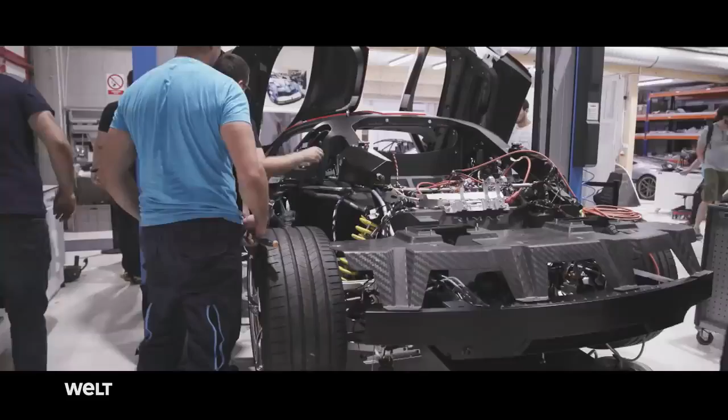The heart of a startup beats in the supercar's production plant. Around 700 specialists manufacture almost all of the prototype's components in-house. They're just throwing you into fire and you need to deal with it. The engineers at the fledgling sports car factory use the results of the demanding crash and stress tests to optimize each millimeter of the supercar.

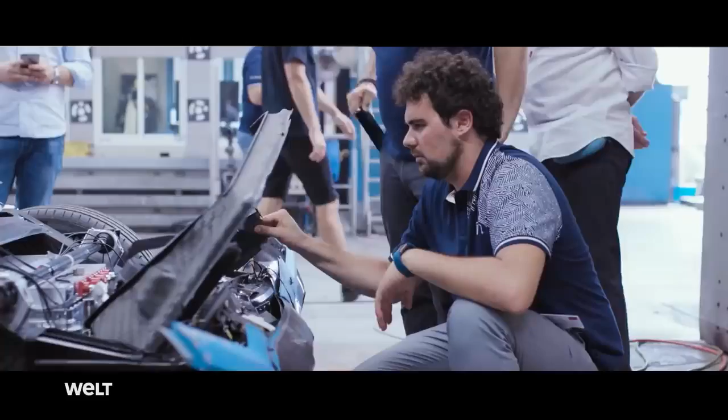We are perfectionists. We want really to show what is possible, and if you want to show what is possible, you cannot cook with the same water like everybody else. At the end of 2020, Rimac will start production of an electric vehicle with the most powerful battery, the most stable chassis, and the best performance in the automotive industry. The C2.

The fastest electric cars come from what was previously automotive no man's land, Croatia. The hypercar manufactory Rimac Automobili is located just outside the capital city of Zagreb in Sveta Nedelja. Since 2009, top technology for super sports cars from around the world has been created at the company's 11,000 square meter premises. Here, 700 specialists are now also developing the components for the manufacturer's latest model, the C2.

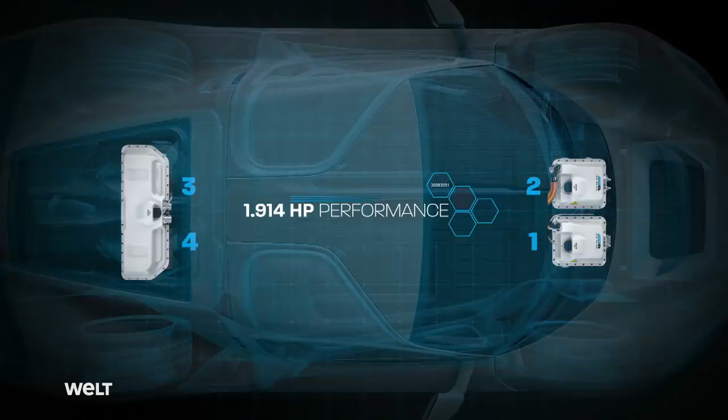The prototype of the C2 is a fully electric GT hypercar, a total of 4 electric motors with an overall output of 1,914 horsepower. They accelerate the electric sports car from 0 to 100 kilometers per hour in less than 2 seconds. The vehicle is automatically governed to a maximum speed of 412 kilometers per hour.

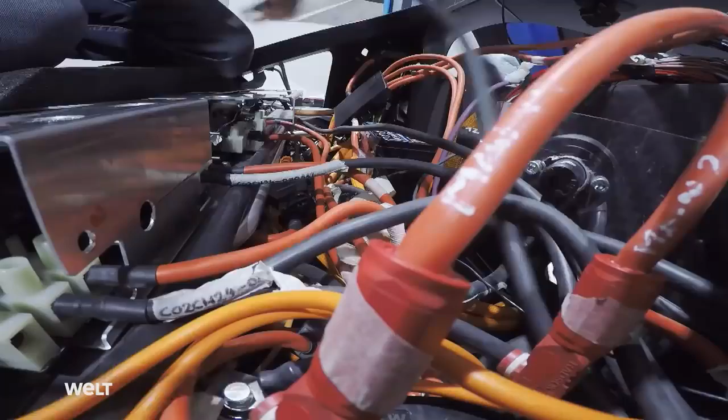The C2 is the second model from the company's young founder, Mate Rimac. A maximum of 150 of the €2 million electric sports cars are to be produced in Sveta Nedelja. Besides its own models, the manufacturer also produces vehicle components for other brands. This extensive in-house production enables even minor component details to be determined individually.

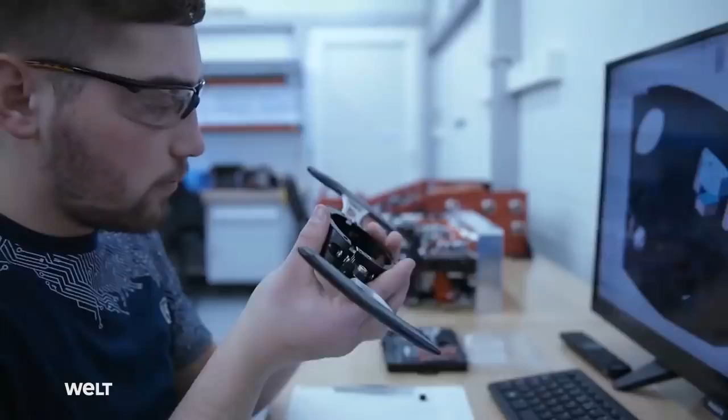What we are really good at is that we are producing the car and also producing the components for the car. And when we do something like that, then you can optimize the whole system. You can optimize the battery for the motor, the gearbox for the battery, and so on. If you can develop all the components in-house, if you have the flexibility, we can really optimize the whole system, the whole car and all the systems inside of the car.

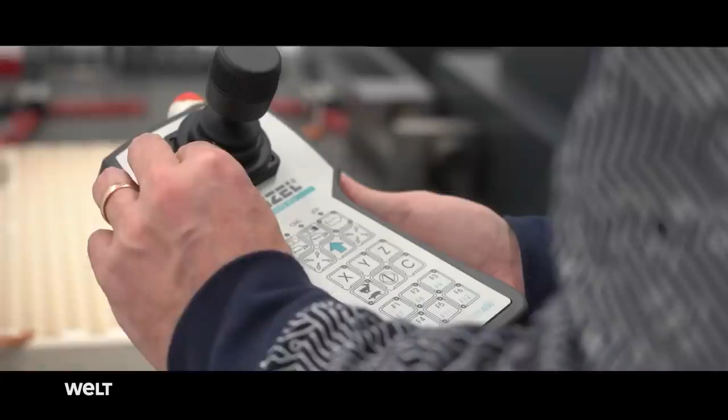The manufacturing facility is equally as individual as the C2's parts. Instead of classic assembly lines, autonomous high-tech departments are found here. Virtually all of the prototype's elements are produced on-site at Rimac. 90% of the C2's basic frame is made of the flexible lightweight material carbon. The Croatians produce the hypercar's 200 carbon fiber elements completely using manual labor.

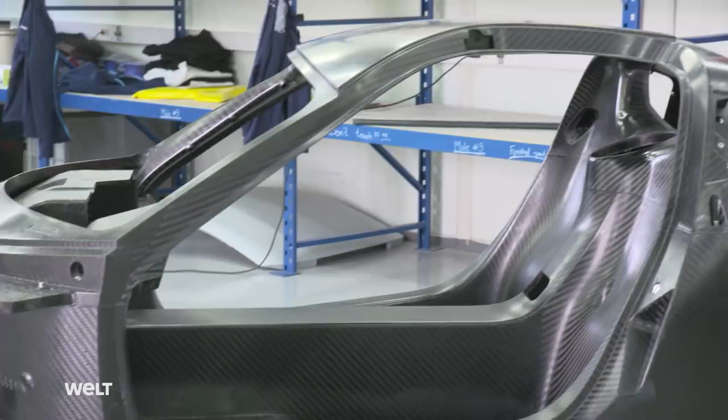I think that's specific for us, that we do it all in-house. Normally other companies do carbon fiber outside. We use carbon fiber to reduce weight. It doesn't rust, it lasts longer, and with composite materials we can produce more advanced material than with the normal technology used in the car industry.

The Croatians have been fine-tuning the individual parts, the design, and the performance of the C2 for the past 4 years. The design engineers have built a total of 16 prototypes and tested them down to the very last bolt. The young company founder's passion for futuristic hypercars began at a very early age.

Our history is a really long one, although it's only 10 years. I was born in Bosnia, where there were no cars where I was born. And then when the war started, we moved to Germany, where there were a lot of cars. My parents tell me that I was crazy about cars before I could walk or talk. When I was 18 years old, I bought myself a 1984 BMW 3 Series, 4 years older than myself.

When the gas engine of that old car blew up, I decided to make it electric and to build it into a race car, to race gas-powered cars, to show that it can be faster than them. Which I did. I broke 5 FIA and Guinness World Records with that car, which was a great learning experience for me, to learn how to build this car and improve it. Although everybody was laughing seeing an electric car on the racetrack, I wanted to show that electric cars don't have to be slow, boring, and ugly.

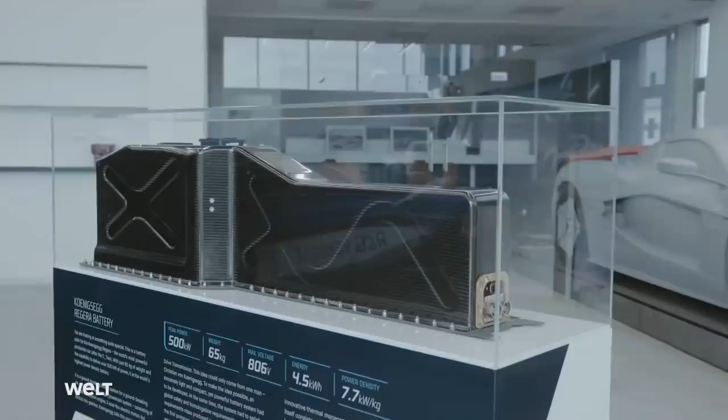None of us had any experience in the car industry, so we had to figure everything out. With no experience, no money, I was 19 years old, so it was a really tough time. But to survive, we started to work for the car industry. We started to develop cars for them, batteries, electronics, and this became our main business, to work for the car industry.

Today, after a lot of hard work of many people, we are now almost 700 people producing some of the world's fastest electric cars, the C2, where we want really to push the limits of what is possible. We want to show what can be done. And we are now in a big expansion phase, and hopefully we'll also build soon a new factory.

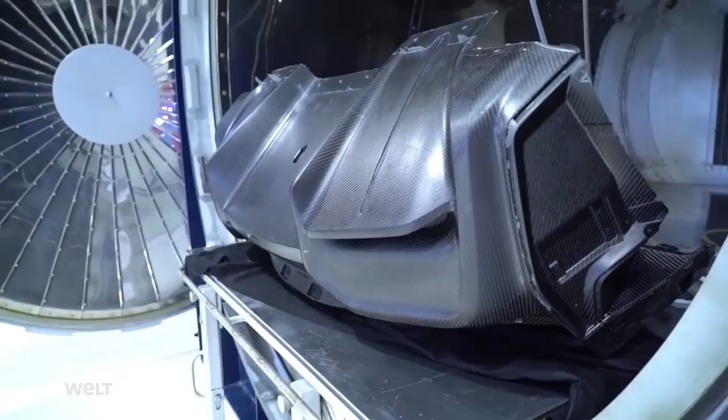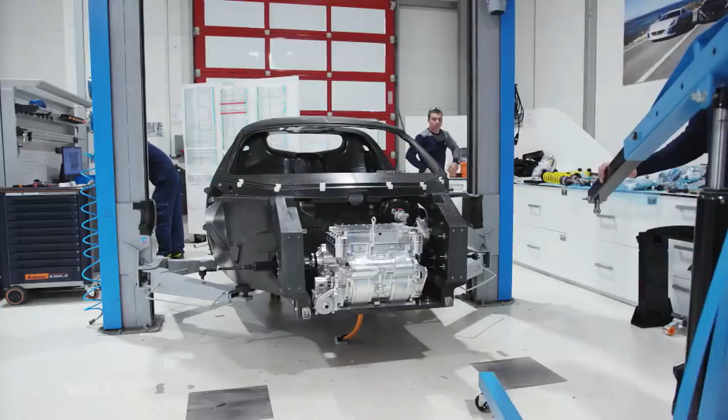Within 10 years, the garage has been transformed into gigantic factory shops. Today, nobody is laughing about the young visionaries' idealistic ideas. Quite the opposite. Global company groups such as Porsche and Hyundai have now invested 115 million euros in the Croatian sports car manufacturer. This cash is being used to fund the development of technologies and components that are unique within the automotive industry.

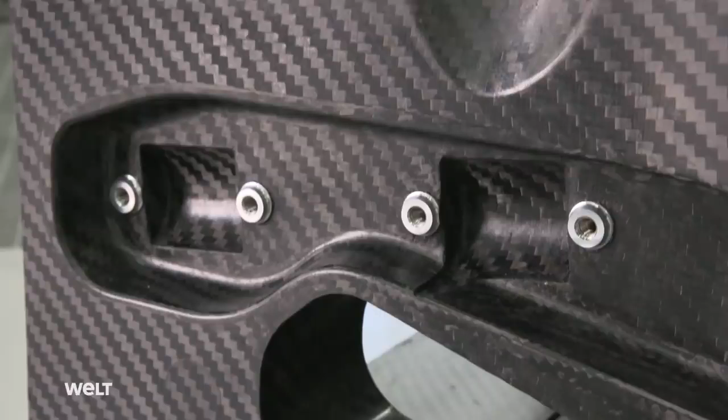This enormous carbon fiber framework comes from the company's own gigantic autoclave. The cockpit frame is a crucial key component in the C2's enormous power output. The electric sports car's outer skin conceals the biggest interconnected fully carbon part in the automotive industry. The 200-kilogram monocoque ensures that the C2 prototype is particularly light and extremely stable.

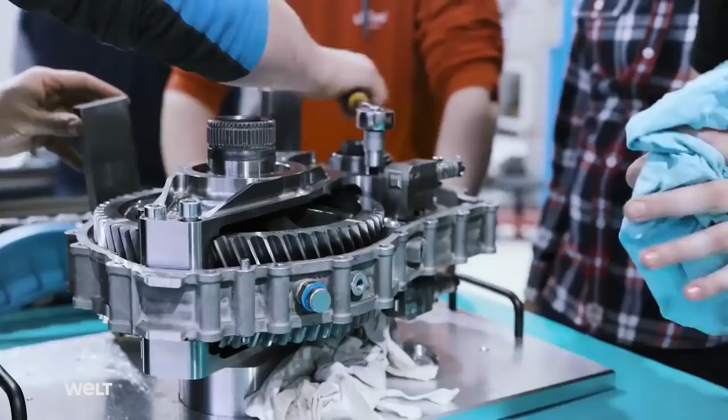In the assembly area, the technicians are now equipping the empty cockpit frame with everything that transforms the C2 into a high-performance car. At first glance, the assembly shop doesn't look like the birthplace of one of the fastest vehicles in the world. Installing the motors still involves real manual work for the technicians.

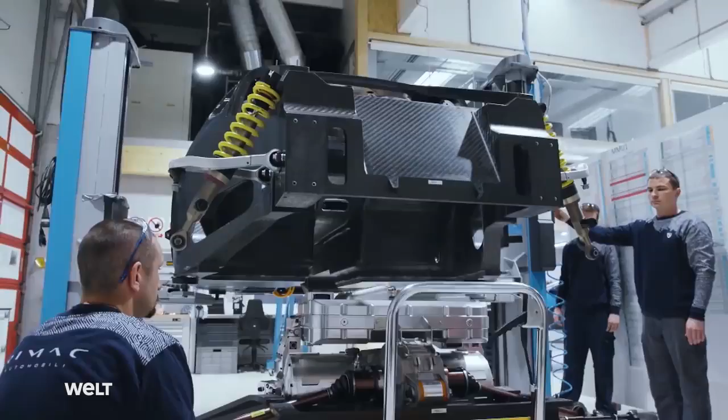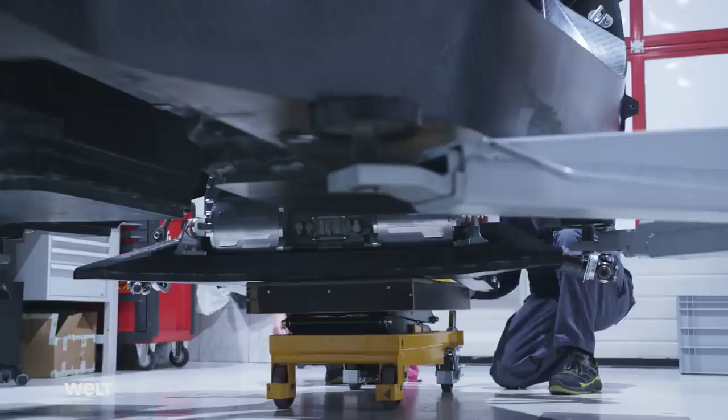The all-wheel drive vehicle is equipped with 4 electric drives and therefore needs no differential. The advantage is optimal control and a maximum efficiency of 97%. This means that virtually all of the powertrain's energy is transformed into kinetic energy. In comparison, the maximum efficiency of a combustion engine is 45%. An in-house motor production facility is also located at the plant premises.

So this is the rear C2 powertrain with the motor, inverter, and 2-speed gearboxes in the rear. So this is the rear powertrain unit with 1000 kilowatts or 1 megawatt. And this is the front powertrain unit with 400 kilowatts. So they are quite different if you look at them. So the front powertrain has the motors in the middle, the gearboxes on the sides, and then the inverter on the top. In the rear, the gearbox is in the middle.

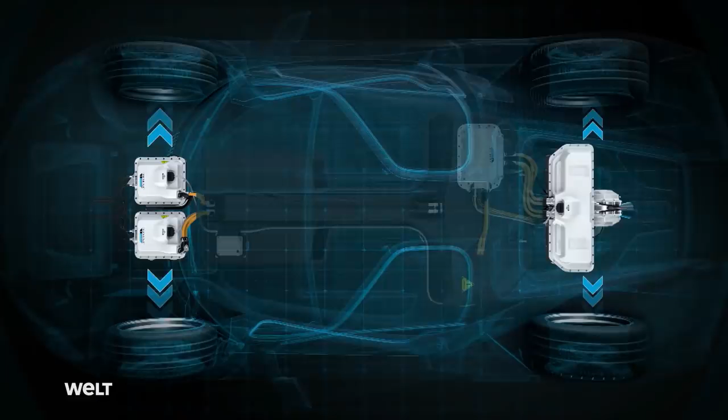It's actually two two-speed gearboxes in there. So every motor has its own gearbox, but they share the housing, and every gearbox is an independent two-speed gearbox. Each motor is a 500 kilowatt, 700 newton meter motor, and the 1 megawatt inverter. So all of these parts are made in the company in different parts and then assembled here. Each of the prototype's tires is equipped with a separate motor. Together, they generate a torque of 2,300 Newton meters.

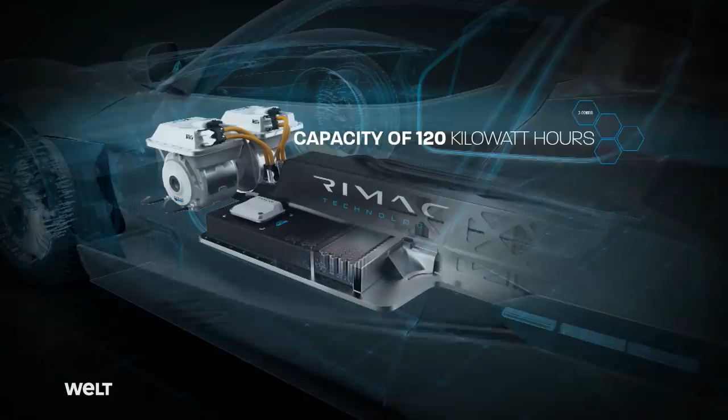The C2 draws the energy for its all-wheel drive from a gigantic battery pack with a capacity of 120 kilowatt hours. This is intended to give the Rimac a range of up to 550 kilometers and to enable it to reach 80% of its rechargeable battery output again in less than 30 minutes during the subsequent charging process.

In the assembly shop, the technicians are now installing the 600 kilogram battery pack in the C2's body shell. The rechargeable battery has an enormous output of 1.4 megawatts. This amount of energy can be used to supply an entire single-family home for several days.

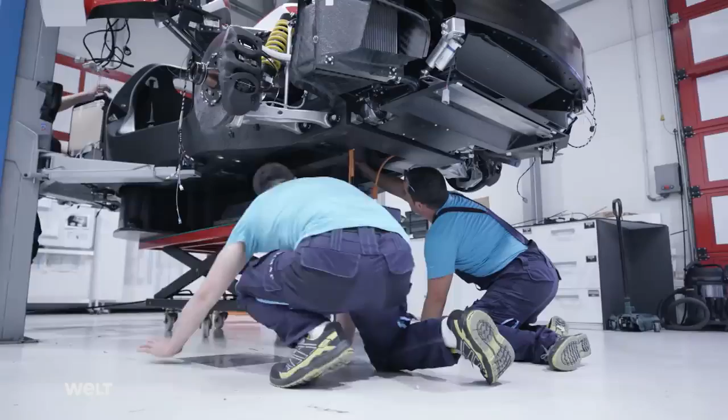The entire rechargeable battery unit consists of 6,960 of these small lithium-ion battery cells and is designed so that each accumulator is surrounded by fire-resistant material in a sandwich construction.

With a length of around 5 meters, the C2 is bigger and even more luxurious than its predecessor. It is also fitted with a complex sensor system and is set up for Level 4 automated driving according to Rimac. Autonomous driving is currently subdivided into 5 levels. The C2 is therefore at the level prior to full automation. The car can be guided completely by the system, even if obstacles suddenly emerge. However, the driver must be fit to drive.

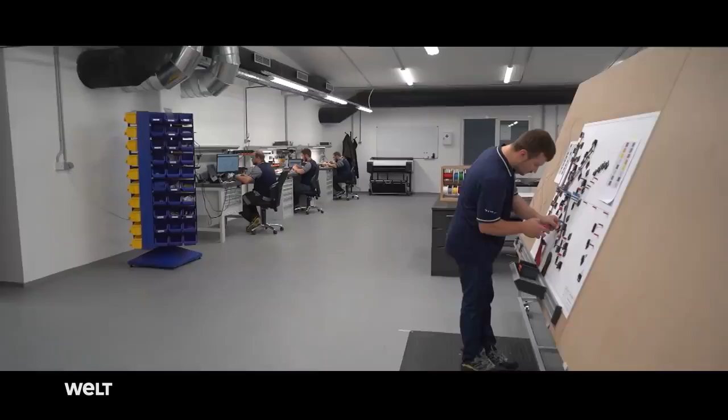Certain components are produced at a further factory site located 40 kilometers from the main plant. Among other parts, the Croatians fabricate the two-seater's wiring harness here. The Rimac's employees assemble each of the 26-kilo looms by hand. The harness consists of a total of 15 different modules that subsequently supply all of the electronic systems with electricity.

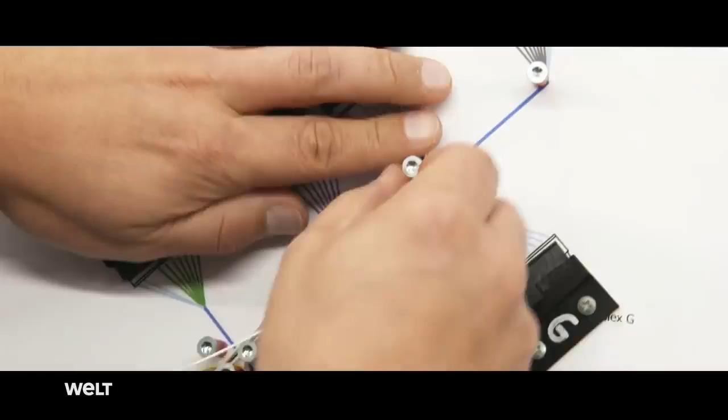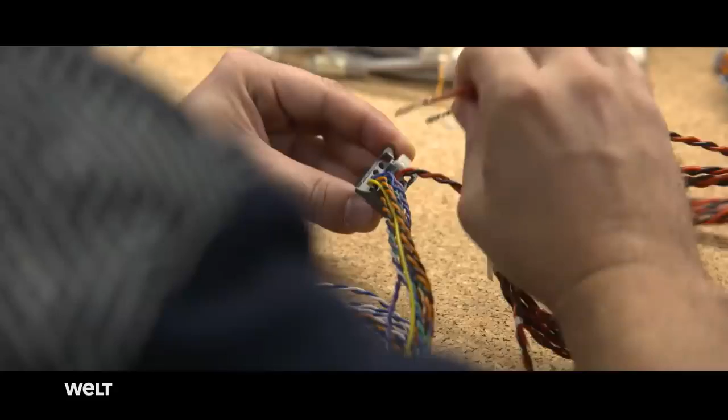Step by step, the electricians process the individual cables for the C2's power output, communication, and sensor system to form the next biggest loom. To do this, they seal the lines with cable lugs. A precise construction plan specifies which cables belong together. The workers took around 2 months to produce the wiring harnesses for the first prototypes. This experience enabled them to optimize the assembly of the 2,400 plug connections.

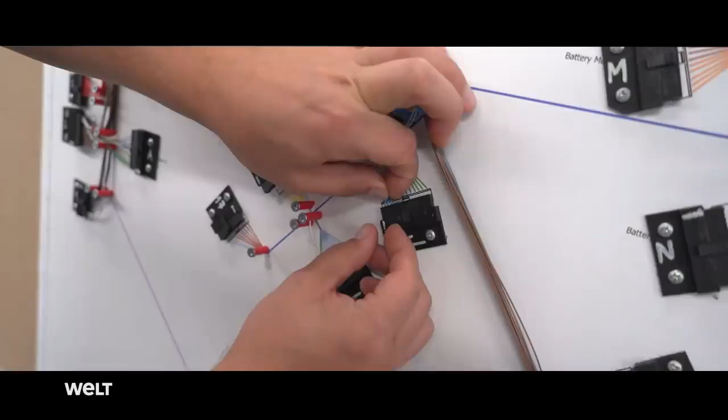In the first 2 experimental prototypes that we did the wiring, we had the wiring harness basically in one piece with some sub-harnesses. And when we installed it in the car, we could actually see what can we optimize, how can we produce the wiring harness faster, how can we produce the wiring harness safer, and what are the limits of usage.

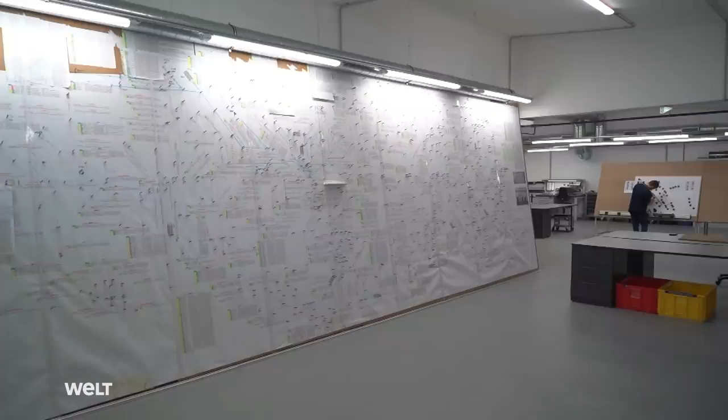The complete plan of a wiring harness measures 24 square meters. The 3.6 kilometers of cables are drawn on it. Later on, they can withstand up to 2,000 volts and are therefore equipped with special Teflon, which enables them to cope with temperatures of up to 200 degrees Celsius. When you have a high temperature or very high voltage, you cannot use just regular PVC insulation because it cannot withstand that.

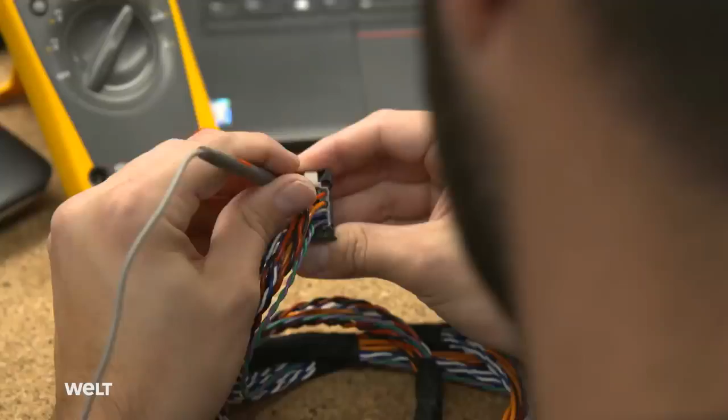These workers are testing the voltage. This is important because later on, a fault can shut down the entire system and, in the worst case, cause a cable fire. Here, each week, 7 employees produce 3 new wiring harnesses.

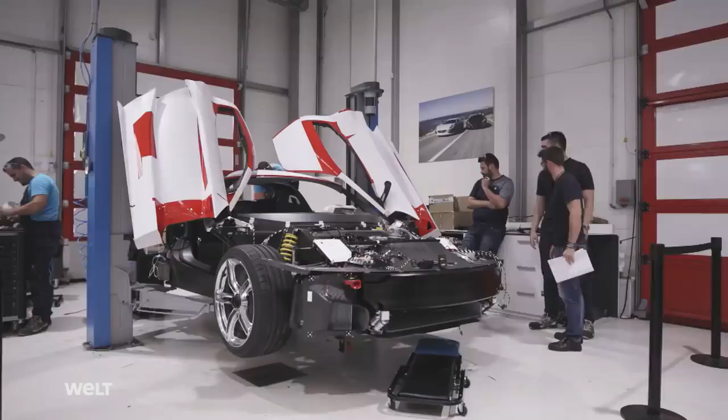In the main plant in Sveta Nedelja, the crew has fitted the wiring harness and all of the other components in the vehicle. Later on, these will supply the C2 with its incredible power. The rolling chassis is now drivable. The only thing now missing to complete the hypercar is the outer paneling.

During the first few years of the company's history, the Rimac team worked on several electrically powered prototypes, including a race car. In cooperation with legendary racing driver Nobuhiro "Monster" Tajima, they developed a near-series version of the Rimac Concept 1. To complete the e-runner on time, the young design engineers had to work under high pressure. The crew developed, produced, and tested the vehicle in just 4 months. The lack of time was not the only challenge they faced.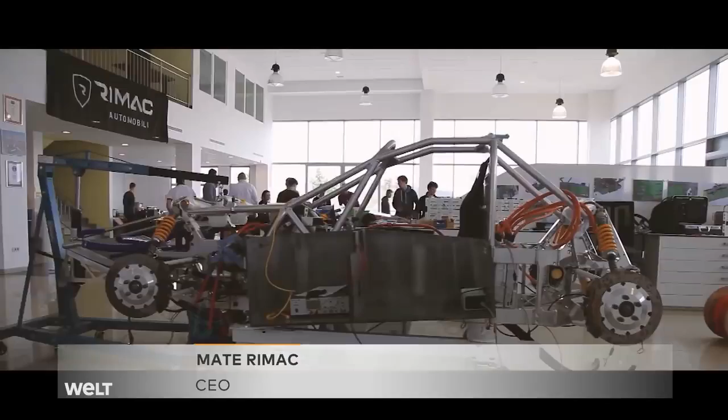There were a lot of challenges, but two that I really remember. So first, because it was an existing chassis, we had to package our powertrain, so the dimensions of the chassis didn't allow for the whole powertrain. So we had to make it shorter, and in order to do that, we were designing a very special transmission system.

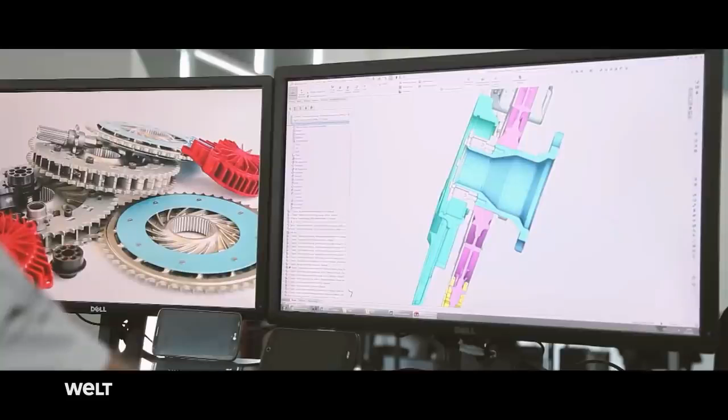Everybody who looked at it said it will never work. So we basically wanted to make a chain drive, and because of the high transmission ratio, the final sprocket had to be very small and the motor sprocket had to be quite big. So it was a big ratio, and everybody said this is never going to work, this was going to break.

To rule out this risk and to test the e-runner's output, the crew took the race car to a special roller dynamometer in Slovenia. The team didn't have much time left because the e-runner then had to be shipped to the USA immediately to get ready in time for a special race. Back then, the Rimac team wrote automotive history.

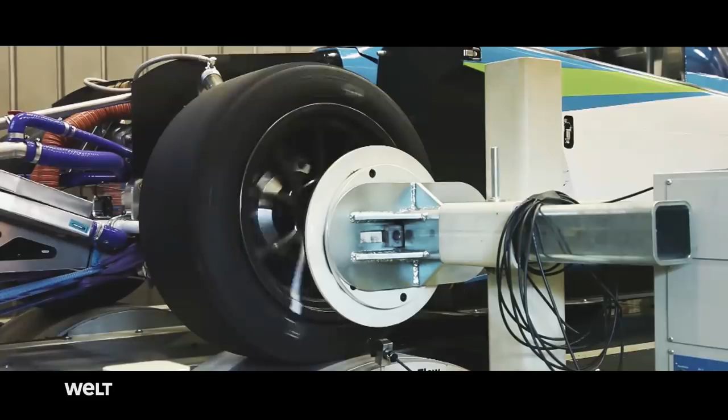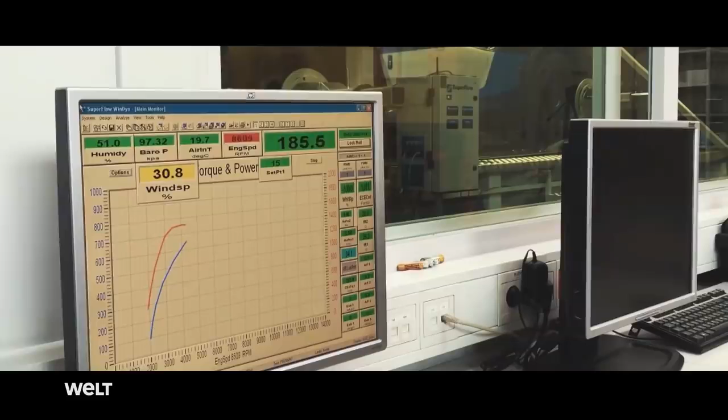In 5 seconds, the race car broke through the 200 km/h barrier on the roller dynamometer. The electric car developed an output of around 1,400 horsepower, a result never before achieved by any other electric vehicle. 1 megawatt. This is a fantastic day. Memorial day. History books. History day.

Racing legend Tajima carried out the final track test in person. You do the first meters, then the first 100 meters, first 1,000 meters. You increase the power gradually, you increase the speed, you increase the pace. But he immediately jumped into the car, went to the racetrack, and wanted full performance. So first time he was really disappointed. He was like, oh, this car is really slow. But we gave him just a little bit of power. We didn't want to increase immediately because you never know what can happen, what can go wrong.

In 2015, the e-runner and Tajima were on the starting line for the first time at one of the most prestigious races in the world, the Pikes Peak International Hill Climb in Colorado. The Japanese accelerated from 0 to 100 kilometers an hour in 2.2 seconds. The hill race is also called the Race to the Clouds because the participants climb around 2,900 meters to the finish line. Tajima, who celebrated his 65th birthday on the day of the race, achieved the best time of 9 minutes 32 seconds. With a top speed of 233 kilometers per hour, he established a new record in the USA at the time.

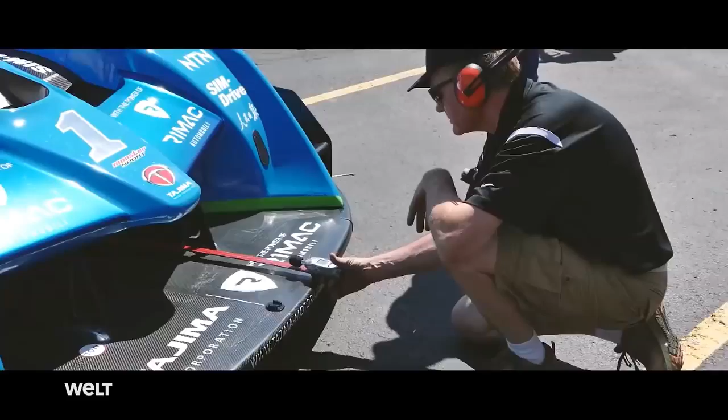The e-runner was created in 4 months. The C2 took the young startup 4 years to develop. The young hypercar manufactory's design department is also located at the company's premises just outside Zagreb. As the C2 is only the Croatian's second model, the team can still play a pivotal role in engineering the DNA of the Rimac hypercars. The design crew from Sveta Nedelja has also retained its startup character. Our team is really motivated, and the spirit of them is that they want to push the boundaries.

Within our team, we are around 15 people, and we cover all the aspects that concern the design, but also the brand. We start with a simple business card, a web page, a simple invitation for an event, all the way to either a component, such as a motor, or the car itself. The people that work here are happy to be able to work on different aspects of this project that we are conducting here. It's clear at first glance that the C2 is different but unmistakable.

Its alternative drive technology also poses design challenges. Each of the supercar's features has a specific purpose because the designers work according to the principle of form follows function. Its bulky proportions are by no means accidental either. We want to show the muscle that there is on each wheel. The C2 is not your typical hypercar, first of all, because it's electric, so it has a completely different powertrain and powertrain layout. In contrast to other hypercars, there is no gigantic engine block in the rear of the C2.

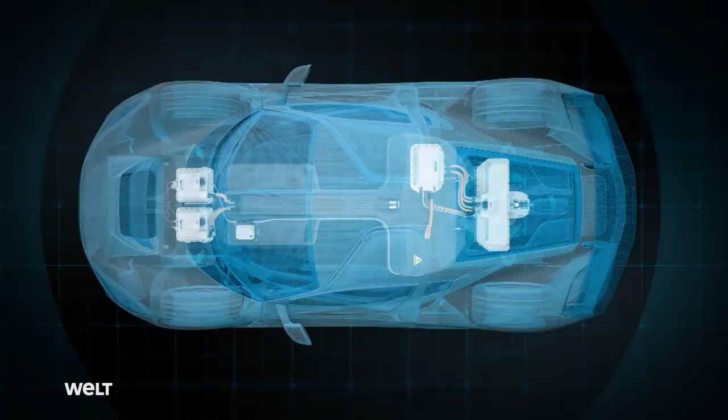Its electric drive is distributed between the vehicle's front and rear ends. The cockpit and also the center of gravity are therefore located precisely in the center of the car. The weight on both axles presses the Rimac onto the road and therefore ensures better road grip. Its enormous butterfly doors are a combination of scissor and gull-wing doors, which don't just look stylish, but above all, they make entering the flat vehicle more comfortable.

At the same time, its design DNA immediately gives away the electric sports car's origin. Rimac's signature sweeping lines on both sides culminate in this bar. It is intended to evoke the unmistakable tie that Croatian soldiers wore during the Thirty Years' War.

The word cravat is derived from the French cravate, the phonetically incorrect pronunciation of Croat, used during the war. On the cravat, there are 3 lamps that actually show which driving status you're in. You can also configure it towards the country of your origin. And you can also show the charging status of the car. It's a very important feature to show also from the outside, so that you don't always have to look on your app or go inside to see what the status is.

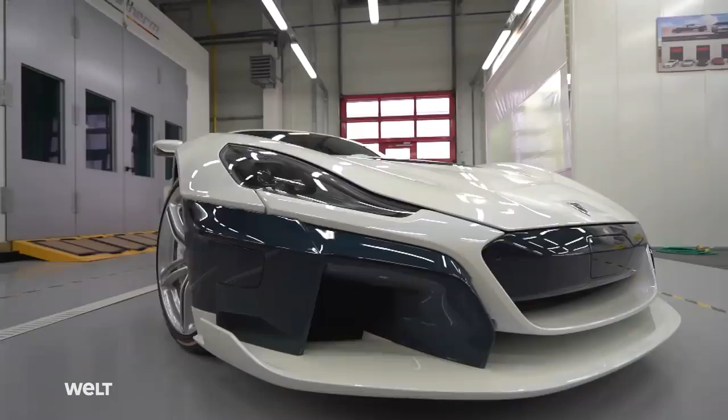The front is the most important part of the car for the aerodynamics. This is where the aerodynamics start. Here we have 3 air inlets for 3 different radiators and 3 different cooling systems. One is for the battery, which is the most complicated one. One is for the front motors and one is for the front inverters. And all these operate on different temperature ranges. This area is highly optimized to have enough downforce on the front axle, but also enough mass flowing through the systems.

An adaptive wing at the rear of the vehicle supports the aerodynamics concept. It adopts different positions depending on the dynamic load. This maximizes the downforce when cornering. The wing also serves as an air brake to stabilize the vehicle during heavy braking.

A 1-to-1 model of the C2 is now making its way into this gigantic wind tunnel. In several hundred test loops, the design engineers test the vehicle's aerodynamics modules here. They are the result of complex calculations and 3D simulations performed by supercomputers. Rimac also boasts its own aerodynamics department.

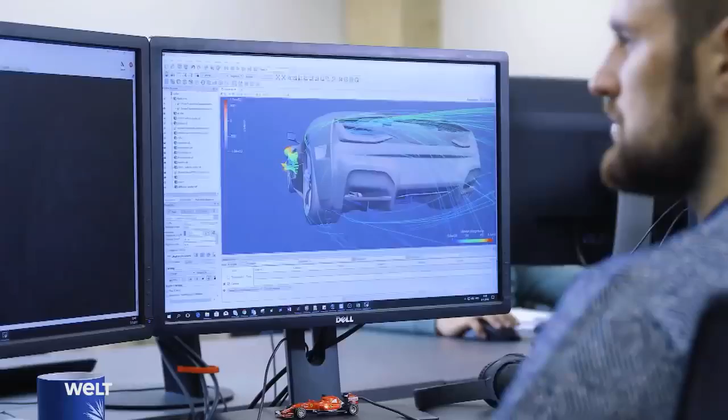It's been a really fast trip. You know, we are developing this amazing car from scratch. The processes are running sometimes for the first time, and we are working hard to make things happen. And when we see the things that we've been seeing thousands of times on the screen, when we see them in reality, they happen. First, we have all the anxiety, oh my God, will that perform the way we wanted? And then after we say, oh, thank God, it performed. Let's see if everything is okay, if everything is really good. As I said, it's been fast. Things are happening really fast.

The engineers then compare the results of the computer's aerodynamic simulations with the reality in the wind tunnel. The results only deviate by an average of 2.4% from the calculations. The aerodynamic systems are aimed at improving the hypercar's performance later on. The Rimac aerodynamics kit includes 3 active components. Air flaps in the hood press the prototype onto the asphalt and cool the batteries. The adjustable spoiler is located at the rear of the super sports car. Depending on its position, it ensures downforce on cornering or stabilizes the vehicle during emergency braking.

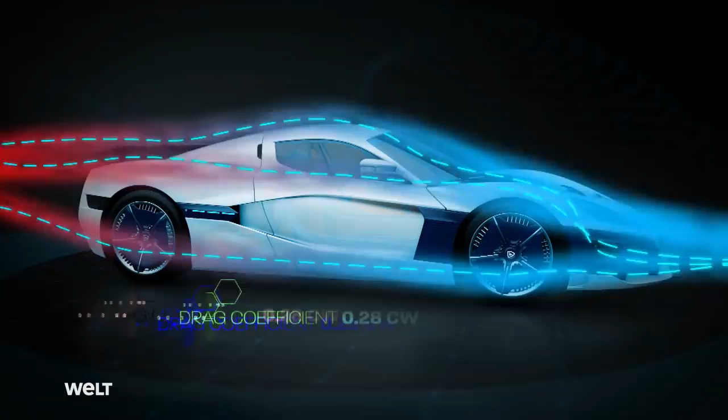With its drag coefficient of 0.28 CW, the C2 cuts through the airstream like a sharp knife. Checking the simulations on the real vehicle is important to decide where the startup should invest in accordingly expensive parts for the next prototypes. The aerodynamics modules press the Rimac onto the asphalt. The vehicle generally lies very flat on the road.

Every hypercar tends to be really low, so you would have to bend really low in order to get your head under the roof. So with these butterfly doors, part of the roof goes up with the door, so you can more easily enter the car. The car's interior consists almost completely of high-quality ultra suede. Later on, buttons on the dashboard can be used to configure how the C2's power is distributed to the axles accurately to 1%.

You can calibrate the car to your wishes. So you can tune the powertrain, you can tune the grip on the wheels, you can tune how you want the torque vectoring to behave. And this we show exactly with our knobs that we have in the interior, and this is a very unique feature that nobody else has.

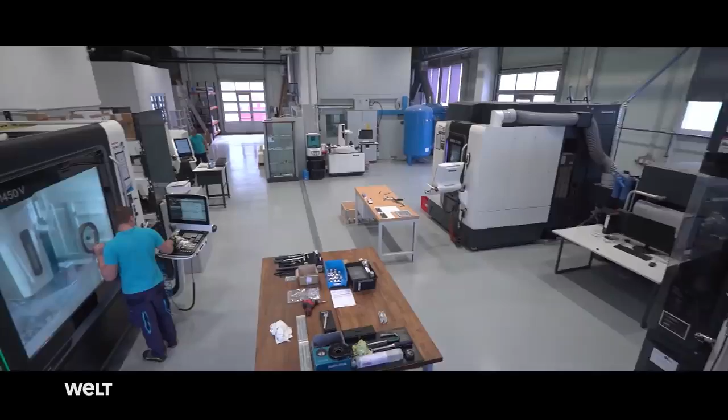To design their vehicles as individually as possible, the Croatians manufacture virtually all parts in-house. Components like the metal rings on the vehicle dynamics controllers are also made at the plant. Gigantic high-tech milling cutters are used at Rimac to manufacture complex aluminum components. Over 1,000 different components are produced at 7 automatic stations. One machine costs up to 450,000 euros and is equipped with highly sensitive sensors. This poses a significant business risk for the young company.

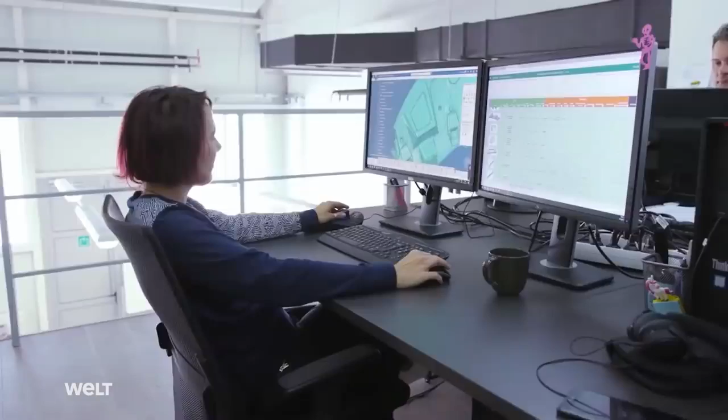Currently, we are still a startup, I would say, between a startup and a serious company. Why a startup? Because we are still growing like crazy, doubling every year. But in the last 2 years, we are not profitable. We are burning investors' money, which is normal for a company in this growth. We were quite unique as an automotive startup, because everybody else that is now starting or has started in the last years is burning money from the beginning for 15 years. We are not.

We were profitable pretty much from the beginning, but the last 2 years we were not. Now the next step for the company is to go from small series production, where we are now, to really large series. So with our own cars, we never want to go into high volume production. We don't want to compete with our customers. Our customers are the big car companies. So as long as we stay at around 100 cars per year, we are not competition for them.

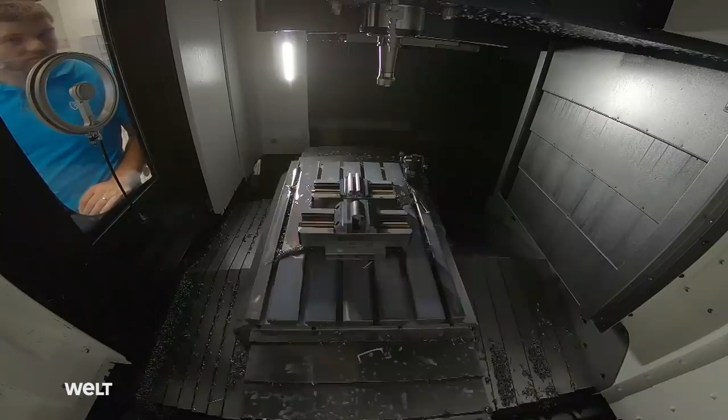However, the production of high-end components for the automotive industry is growing continuously. The machines can transform raw steel, aluminum, copper, and plastic into precisely adapted components. Each automatic machine is equipped with around 50 different milling heads. At 20,000 revolutions per minute, they turn, mill, drill, and engrave the raw material.

The housing for the battery cells is also produced in this department. It is made of a particularly fire-resistant polymer foam that is also used in aerospace. A system sends the construction plan for the battery carrier to the milling cutter. The machine then produces a new battery housing fully automatically, with a maximum tolerance of 0.1 millimeters.

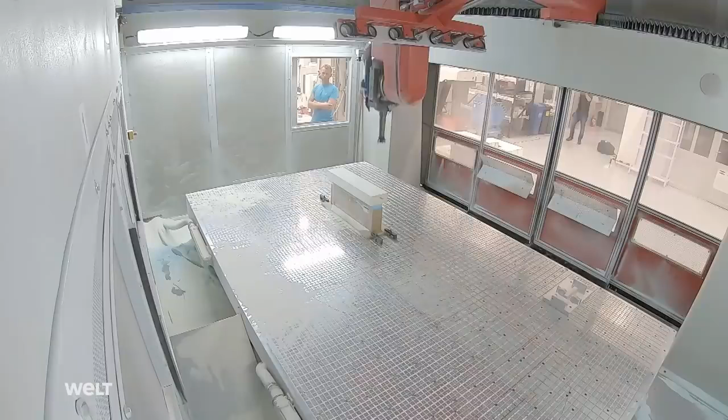The new battery housing then proceeds to a measuring station. An employee checks that all dimensions match the construction plan. To do this, the station moves over the polymer foam framework, and a test finger scans each of the holes. Later on, when the batteries are fitted, the housing is seated in a composite fiber sandwich to shield the battery cell's thermal energy from the environment.

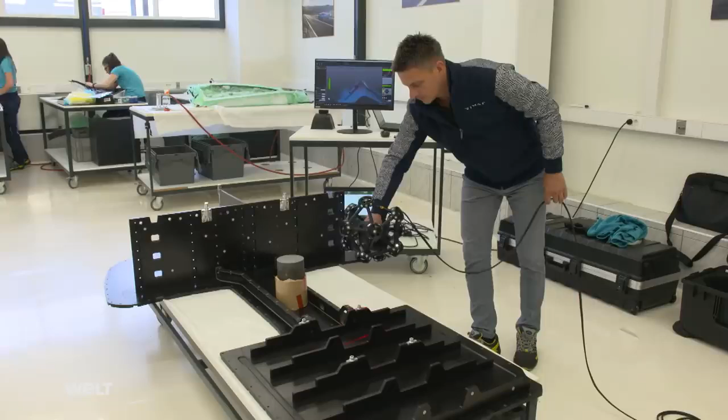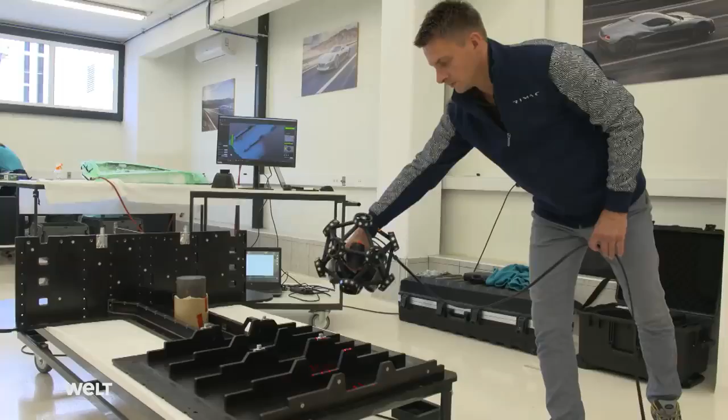The battery pack is cooled from beneath by an aluminum plate. So that everything is seated precisely later on, the workers now also measure the battery's heat sink. They run a high-precision 3D scanner over every centimeter of the aluminum frame. The measured data produce a precise 3D model on the PC, which the crew then uses to compare all of the battery pack's individual parts.

The higher the energy density of the battery cells, the greater the risk that they might catch fire. The vapors which then occur with cells that contain lithium are toxic, and a fire is very difficult to extinguish.

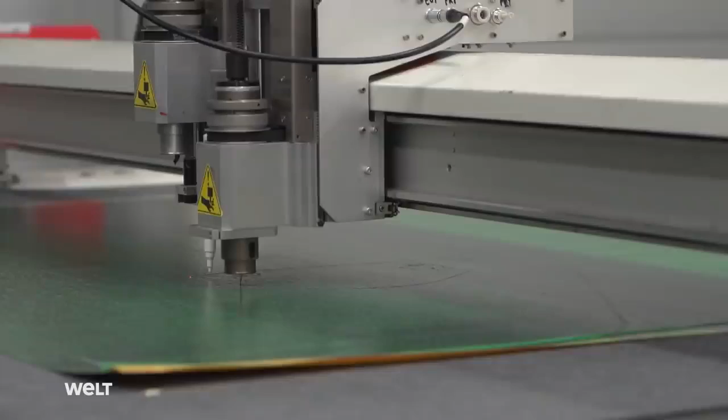This machine, a CNC cutting system, is used when a new carbon element is produced in the composite production department. It transforms the raw carbon fiber mats into cutting patterns for the individual components. It can cut up to 1.5 meters of the material per second. The automatic CNC machine is therefore up to 6 times faster than a human.

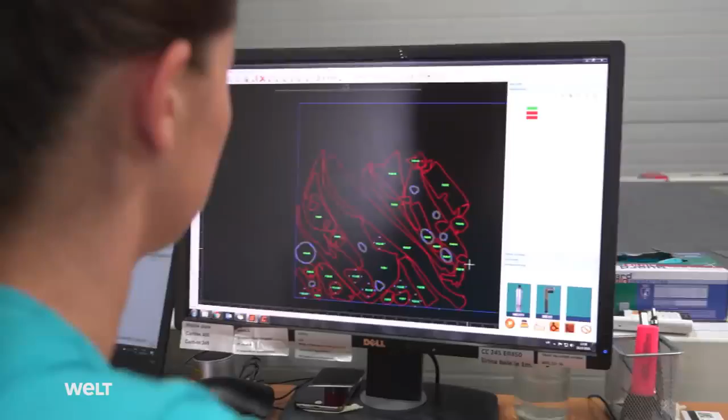The cutting patterns for a new component are stored on a computer. Once the employee has checked the template, the system forwards the information to the machine. It is equipped with a camera and a sharp knife. After it has measured the carbon mat, the machine cuts the blanks from the material.

The raw carbon plates have to be stored at -17 degrees Celsius. The mats are coated with a 2-component adhesive consisting of a resin and a hardener that is activated by heat. That's why the employee is now fetching the trimmed raw material from the cooling chamber for further processing.

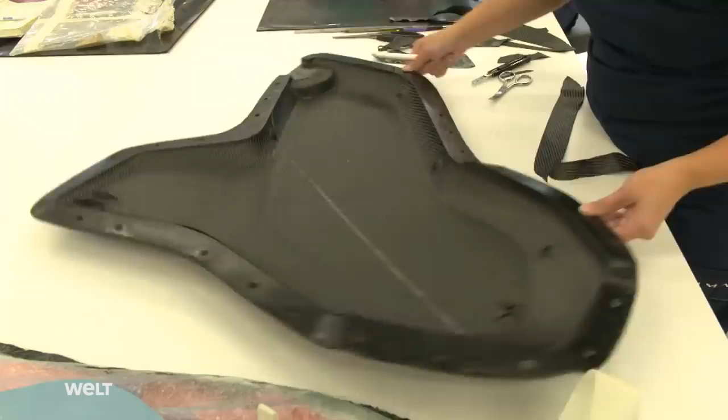The 25 employees in the carbon processing department line these plastic molds with the pre-cut carbon fiber parts. They are the negative of a vehicle component and are also made at the plant. These workers prepare each mold according to a specific system before they are equipped. Right now, they're preparing the pattern for a rechargeable battery.

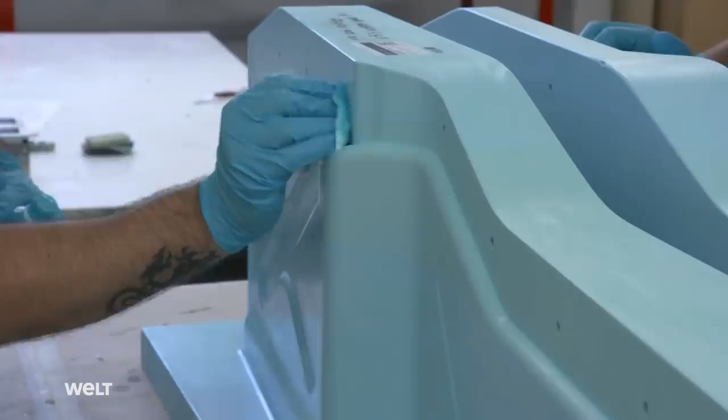So that the fibers lie on the molds like a second skin later on, these workers first clean their surface. The men then apply several coats of a chemical mold release agent onto the plastic. The employees need around 3 hours to prepare a mold.

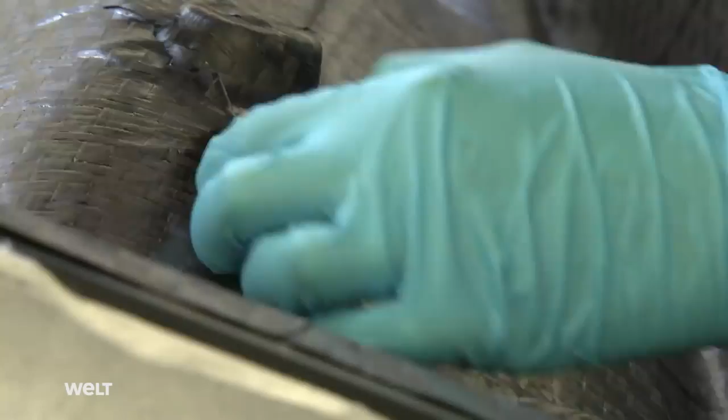In the composite production department, this worker is just fitting the corresponding pre-cut carbon fiber parts into a door lining mold. In technical jargon, this process is also called laminating. Wet lamination is carried out at Rimac. This means that several layers soaked with a special fluid are pressed onto the molds. The Croatians produce a total of 300 different components using this process.

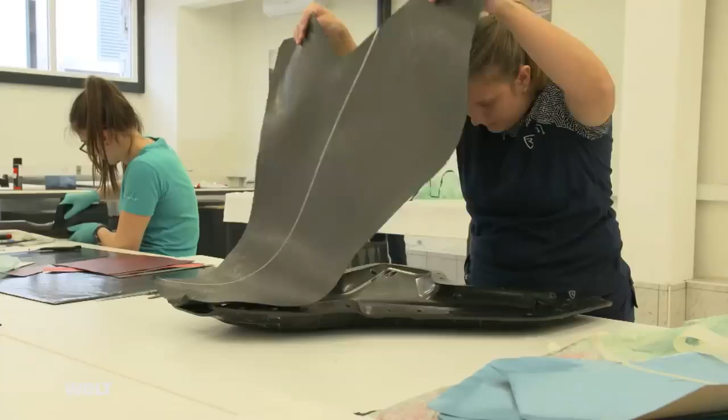When we make pieces from carbon fiber, every piece is different. Sometimes we can use 10 layers of the carbon fiber, sometimes just 3. It depends if the actual part must be strong or if it must be visual. So sometimes we combine many different materials, not just raw carbon fiber.

Normal industry uses metal sheets. So if you have metal sheets, you have one thickness in the whole product. It's just one thickness of material. So we can put additional plies where we need additional stiffness on the product, just locally. Then we make it stronger where we need it, and where we don't need stiffness, we use fewer plies.

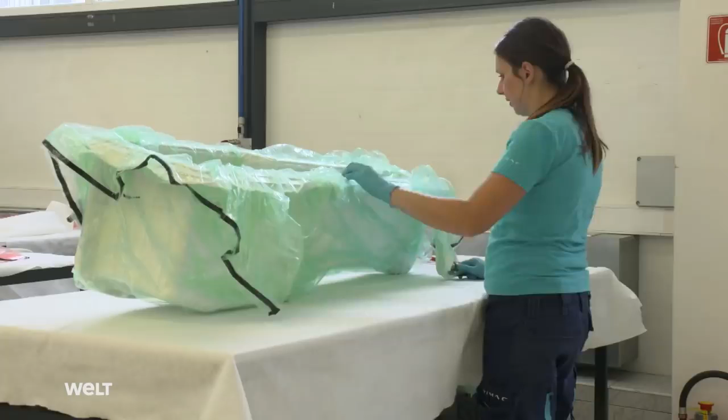Once a component has been completely laminated, the workers package it in a plastic sack. They use a hose to extract air and surplus resin from the film. This vacuuming is important for the next production step because the laminated plastic mold is also a baking form at the same time. The carbon blanks are placed into a gigantic oven for curing.

There are 2 autoclaves at Rimac. The ovens function similarly to a pressure cooker. The worker first positions the parts on a table. He then connects these hoses to the sack's valves. They generate a vacuum in the plastic sacks during the baking process.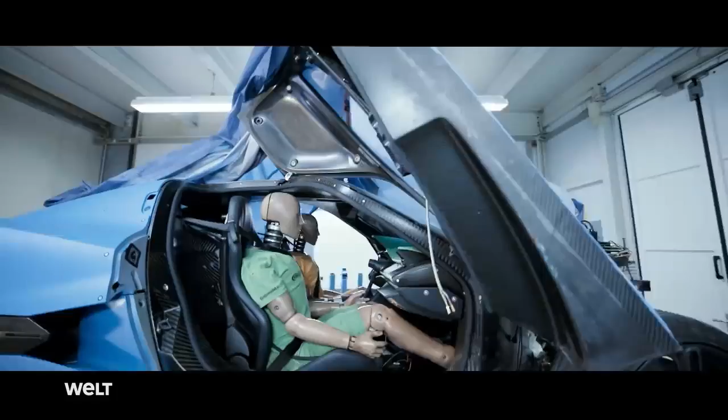The next test really hurts the carbon cockpit and the C2 as a whole. The car has to show how safe it is in a crash test. The front frame goes first, but right afterwards, the engineers will crash the prototype, costing around 1 million euros, against the wall. What the supercar is about to experience has been simulated many times before on the computer by the engineers.

The simulation allows the engineers to evaluate the performance of the part system or full vehicle. We don't need to have a design that is so mature to produce one prototype, which is expensive and takes a long time, to test it physically, to see the failures, and then update the design. We can do this in a virtual world. It is way faster and cheaper also. Basically, it allows us to have many more iterations than we would have if we used only prototypes.

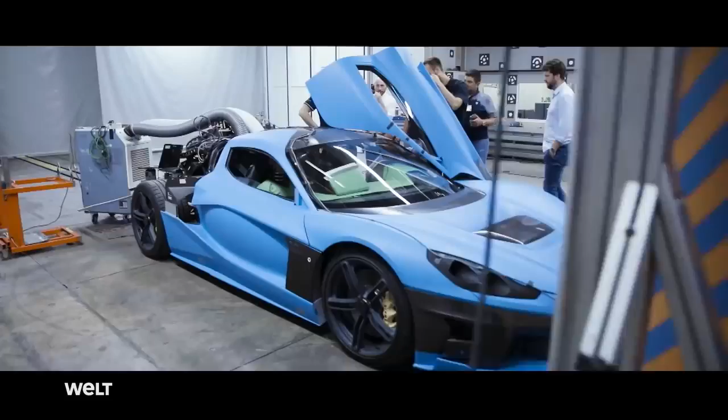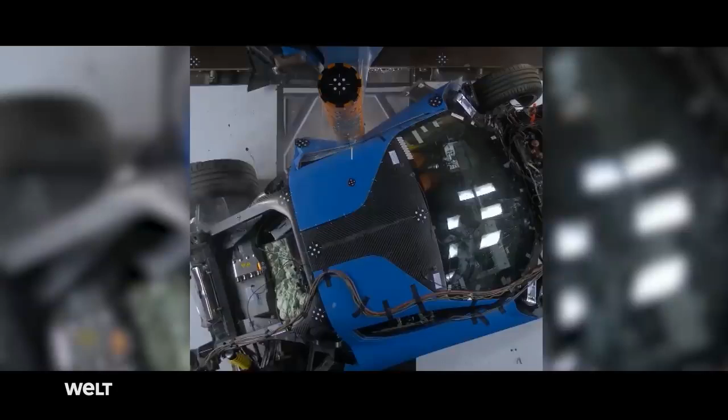The high-end engineers now drive the C2 into the wall at 56 kilometers per hour. The Rimac has to undergo a total of 5 crashes: 2 frontal impacts, 2 side crashes against a mast, and a rear-end collision. The Croatians then take a precise look at all of the damage to compare it with the computer simulations.

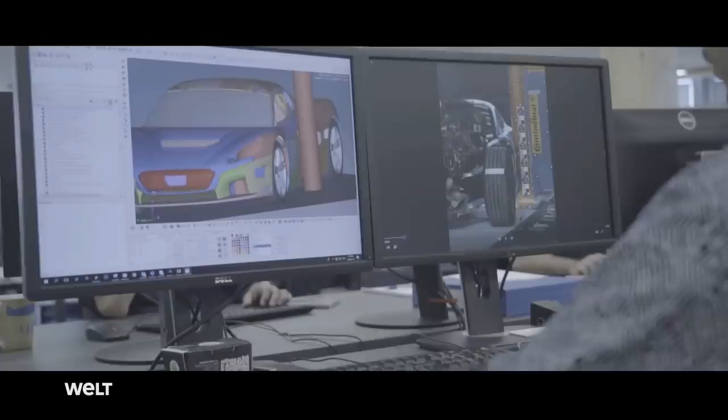In Europe, a 5-star system is used to tell consumers how safe a vehicle is. The damage suffered by the cockpit is particularly important. It's allowed for you to have some intrusion inside the cabin after the crashes. You're gonna have 5-star cars and you're gonna see intrusion. We don't have it. For the frontal crashes, 0 intrusion in the cabin.

Rear crash, 0. If you measure the wall of the monocoque, the wall is there in the position. Only the door is working. The cabin where the driver is, it's completely sound after a high-speed crash. It's perfect. You don't have problems to be inside. The crash test results help the engineers to continue optimizing their top technology and their hypercar.

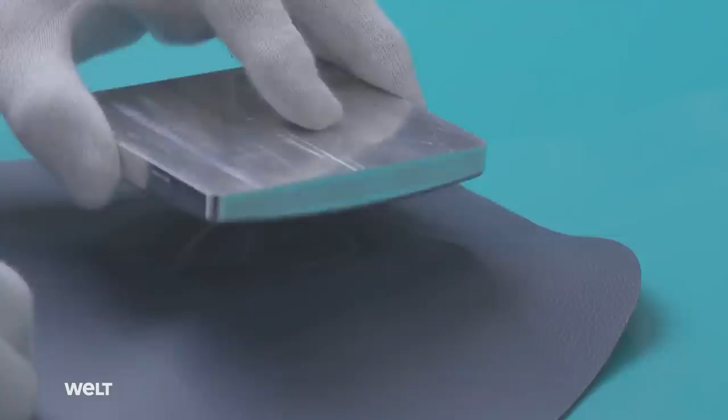This not only applies to the complex electronics and the design. The Croatians are also developing suitable materials for the car's spacey interior equipment in their own small upholstery department. We're still looking for suppliers. We had 2, but we're currently negotiating with 4 others. We haven't yet decided specifically who's going to be our key supplier. Based on our efforts, we can say that the quality of the products on the automotive leather market is sometimes inadequate. There are a few high-quality tanneries around the world, and we're doing our best to contact the best one.

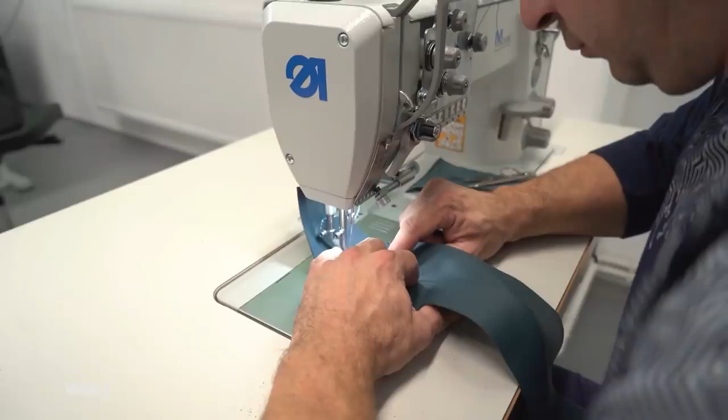The saddlers need 5 hides or 30 square meters of material for a complete interior, because the C2 will also be available in a vegan version. The interior designers are only interested in top quality leathers. One hide costs up to 600 euros. The color range encompasses 30 different shades, which the subsequent owners can also combine. In the Rimac upholstery shop, 3 employees cut, punch, bond, and stitch all of the individual parts for the hypercar's interior. They need 4 days to produce a complete set of interior equipment.

The Croatian sports car manufacturer's success story began with the Concept 1, the C2's predecessor. When it started production in 2016, the two-seater was the first electric super sports car and offered the best acceleration of any electric vehicle worldwide. The young design engineers already had the vision of the C2 in their minds, even while they were still developing their first model.

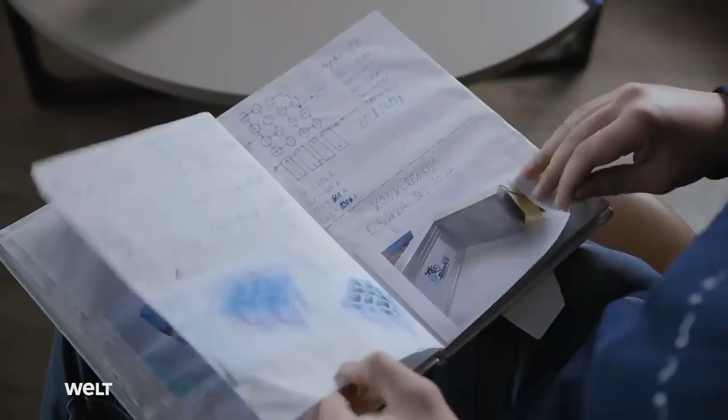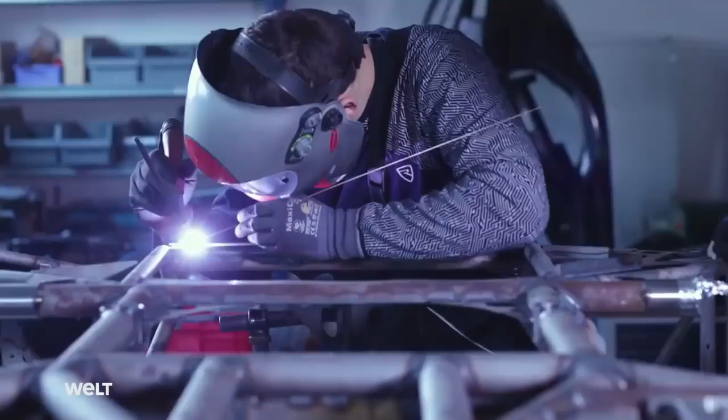The C1 was always for me just like a step towards the C2, because at the beginning we didn't have the money to do it properly. We didn't, for example, have an autoclave to make big carbon fiber parts. The Concept 1 was a steel chromoly space frame, it's not a carbon fiber monocoque, those kind of things. We simply didn't have the resources, we didn't have the people, we didn't have the know-how, we didn't have the money. But already then, I think in 2011, we already had the first concepts and sketches and so on.

But it took us 10 years to build up a company that can actually do the C2. So it was in my mind from the beginning, that's the car I wanted to build from day one, but we couldn't until now, basically. To implement their second model, the Rimac entrepreneurs had to restructure their company again.

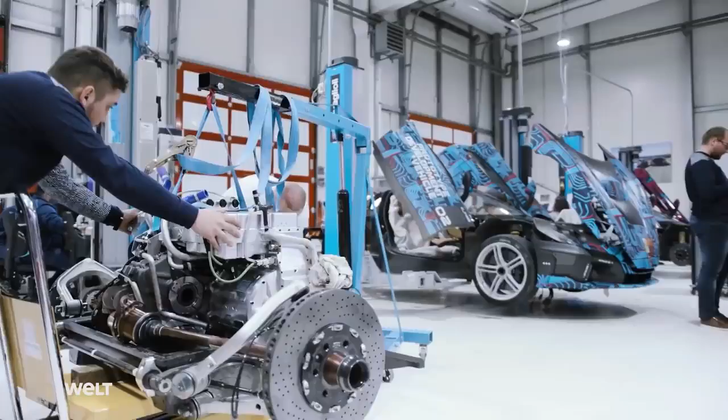So we were keeping track of what's happening on the market, of the technology. We were constantly improving the technology on Concept 1 and also on B2B projects that we were doing. And then at one moment we just noticed that it's really time to start building our own car, the new one. So we established a complete team that will be handling just that. And we separated the company from mechanical engineering and electrical engineering to vehicle engineering and component engineering.

With the C2, Rimac wants to demonstrate once again that electric hypercars are just as good as their combustion engine counterparts in terms of design and performance. To do this, the smart two-seater is put through a series of tough tests. An extensive driving and aerodynamics test takes the visionaries to the northwest of Croatia. On the Grobnik racetrack, the developers take 2 different C2 prototypes to their limits.

With 15 curves and a length of around 4 kilometers, this track was the venue for the Yugoslavian Grand Prix as part of the Motorcycling World Championship until 1990. Here, the test drivers can accelerate both of the models up to their top speed. This prototype already has active aerodynamics systems and is equipped with the latest technology. Its blue counterpart is one development stage behind it.

The developers' objective is to compare both models with one another to determine how the C2's update behaves on the track. At Rimac, the developers themselves occasionally like to jump into the driver's seat. When you press the throttle all the way with that car, you actually feel the heat at the back of your head because the blood inside of your head moves to the back of the head. So it's really amazing. You are scared a little bit and you are feeling a little bit uncomfortable, but you're feeling really good because the speed and the acceleration of the car is amazing.

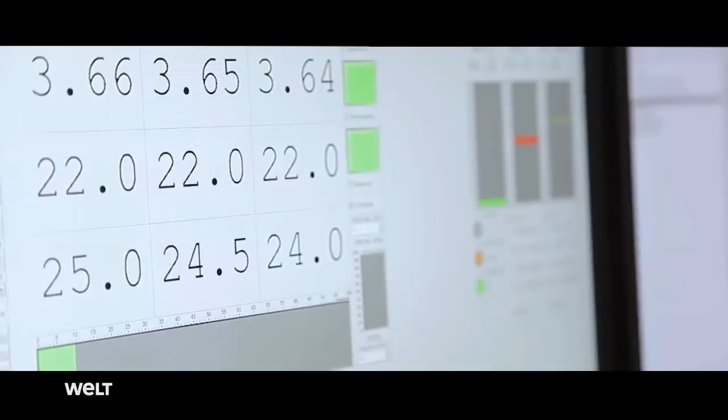The engineers use the tests to optimize their prototypes down to the last detail. When the design engineers have improved a component, they check it in a stress test. Because these test benches often cost millions of euros, the high-end engineers build their test station using their own equipment. This dynamometer is intended to measure the power of a C2 motor. A Concept 1 drive is used as a resistor for the electric motor. It controls the test unit.

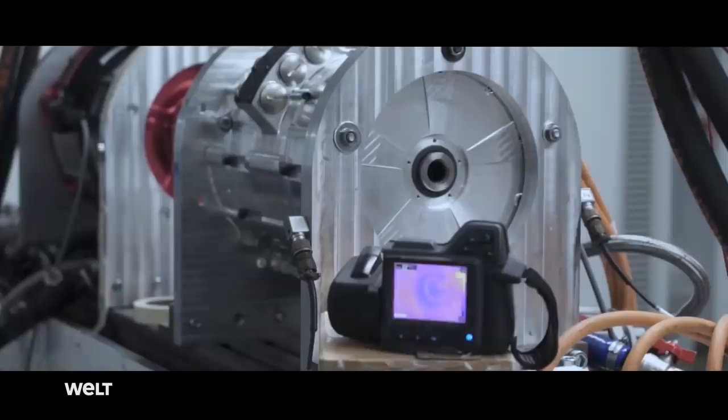The Croatians have strapped both motors firmly to a stable iron frame. The computer then uses sensors to measure the C2 drive's output values. An electric motor functions by outputting electricity from the rechargeable battery to a copper coil, fixed in position in the motor housing. It drives a movable magnet, which is in turn connected to the wheel axle. This leads to propulsion.

It is precisely this self-made mentality that makes businessman Mate Rimac's sports car manufactory so special. I never wanted to build electric supercars to save the environment or save the world. Why I made electric cars is because I really believe that an electric motor is a much better machine than a combustion engine. The C2, you know, this is a car developed by car enthusiasts, not by hippies. We're not hippies here.

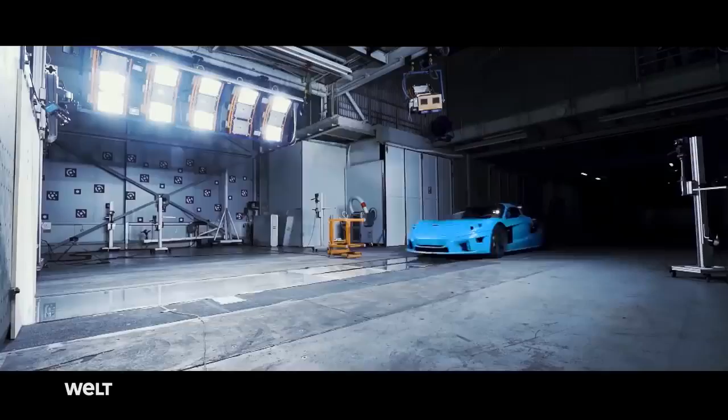I see Rimac as a leader of electric supercars in the future, like the gold standard for high-performance electric cars, and that our components are adding value to many other car companies trying to make good electric cars. It will become something to be proud of if you have Rimac inside another car company's car. So, the most powerful electric sports cars in the world come from Croatia. But Rimac is not only focused on high-end technologies and its own hypercar models. In Sveta Nedelja, authentic visionaries are structuring the future of the automotive industry.